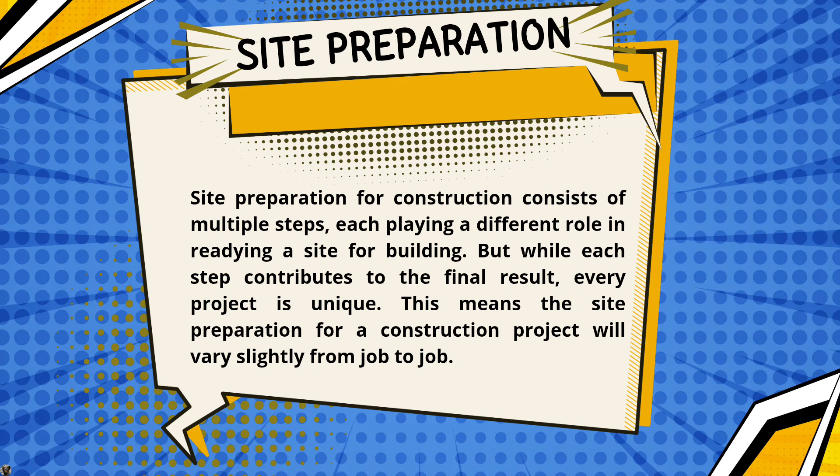Okay, firstly, we have site preparation and setting out. Okay, so what is site preparation? Site preparation for construction consists of multiple steps, each playing a different role in readying a site for building. But while each step contributes to the final result, every project is unique. This means the site preparation for a construction project will vary slightly from job to job.

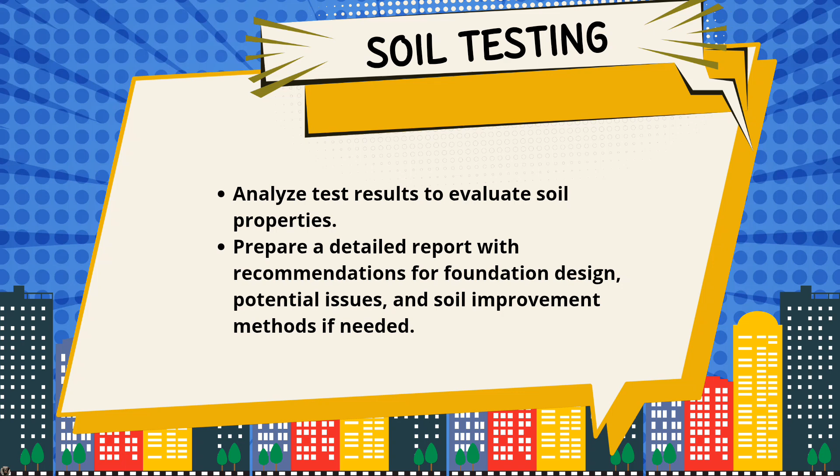Okay, so this is the step of site preparation. First, we have soil testing. Soil testing can analyze test results to evaluate soil properties, so we can prepare a detailed report with recommendations for foundation design, potential issues, and soil improvement methods if needed.

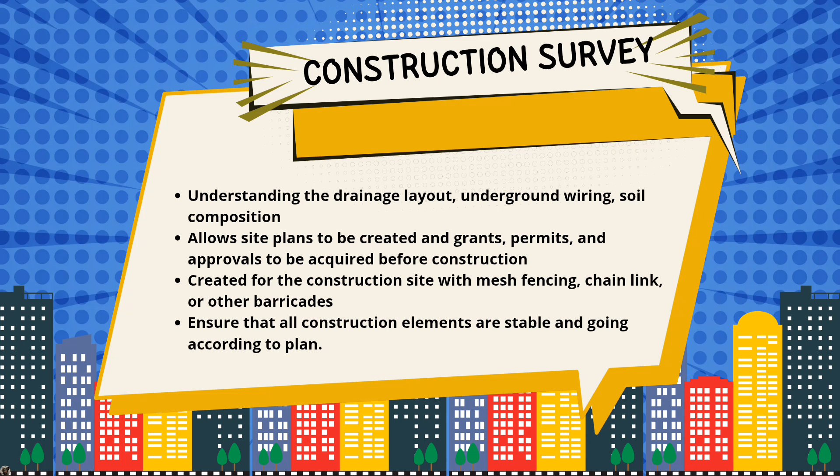For construction survey, this means understanding the drainage layout, underground wiring, and soil composition to allow site plans to be created and grants, permits, and approval to be acquired before construction. Construction survey also can secure the construction site with mesh fencing, chain link, or other barricades to ensure that all construction elements are stable and going according to plan.

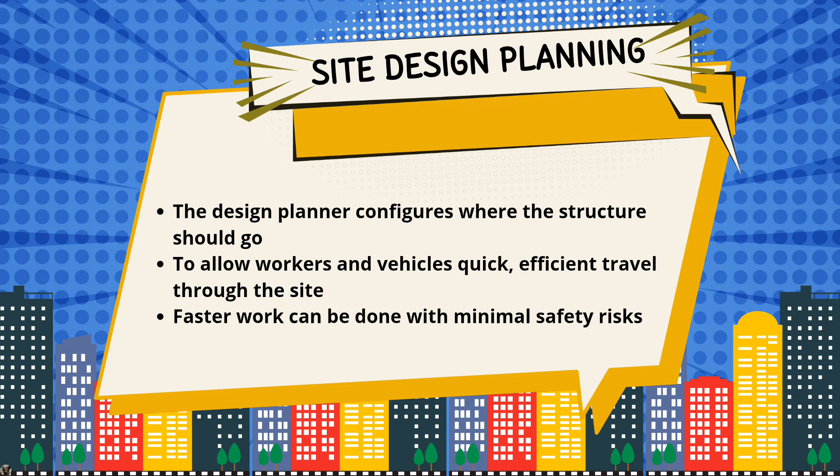After the site has been appropriately evaluated, a design plan can be created. The design planner configures where the structure should go, along with the septic and drainage system. Access points are also implemented to allow workers and vehicles quick access. The better mapped a construction site is, the faster work can be done with minimal safety risk.

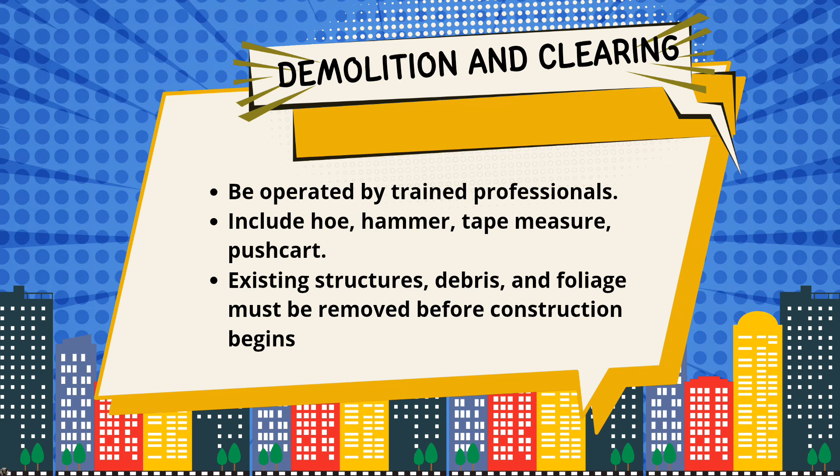For demolition and clearing, this will require heavy equipment that can only be operated by trained professionals. Equipment might include hoe, hammer, tape measure, and push cart. Existing structures, debris, and foliage must be removed before construction begins. This might include large rocks, tree stumps, old structures, or other obstacles.

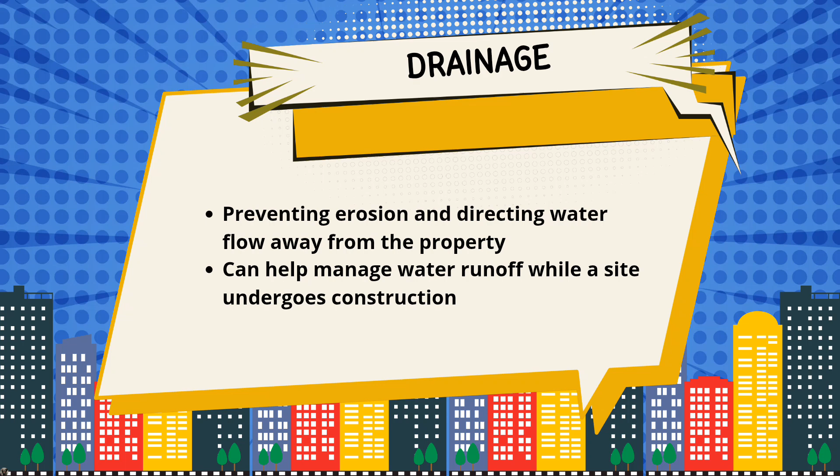So, it's time to install the drainage system. Proper drainage is crucial for preventing erosion and directing water flow away from the property. Systems like silt fences and retention ponds can help manage water runoff while a site undergoes construction.

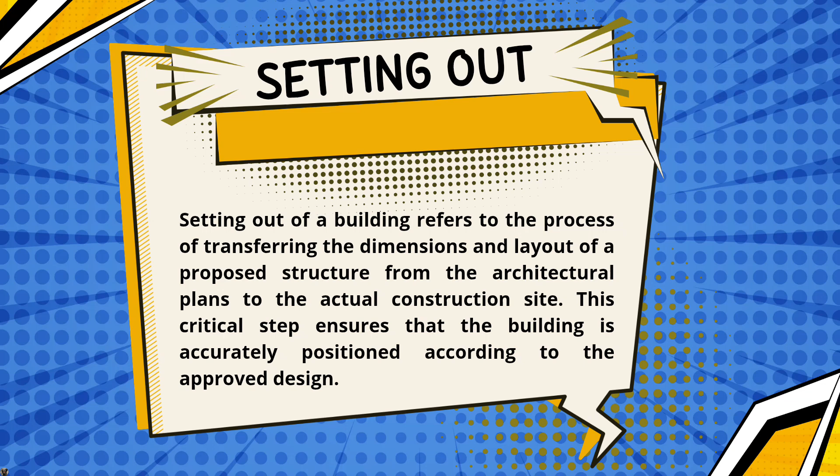Okay, so we move to setting out. What is setting out? Setting out of a building refers to the process of transferring the dimensions and layout of the proposed structure from the architectural plans to the actual construction site. This critical step ensures that the building is accurately positioned according to the approved design.

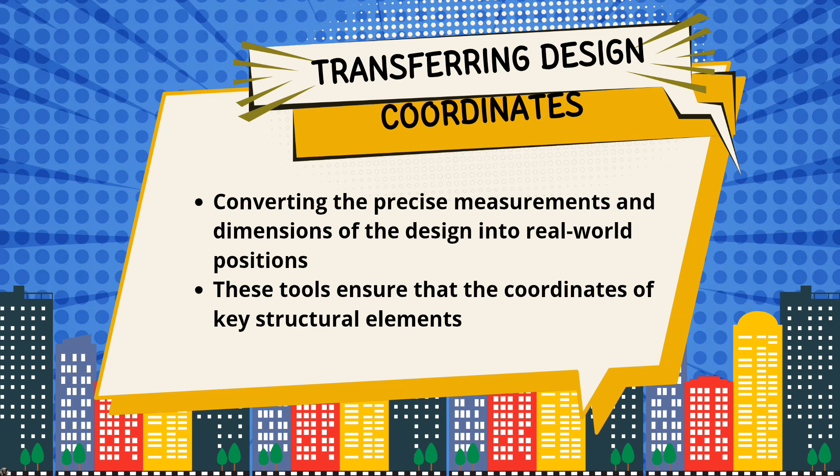So this is the step of setting out. Transferring design coordinates means converting the measurements and dimensions of the design into real-world positions. These tools ensure the coordinates of key structural elements. For establishing control points and markers, users can set up additional control points and markers that will guide the construction process. Stakes, nails, bolts, or paint are placed at critical locations around the site to indicate the edge of the foundation, the centre of load-bearing walls, or the position of columns and beams.

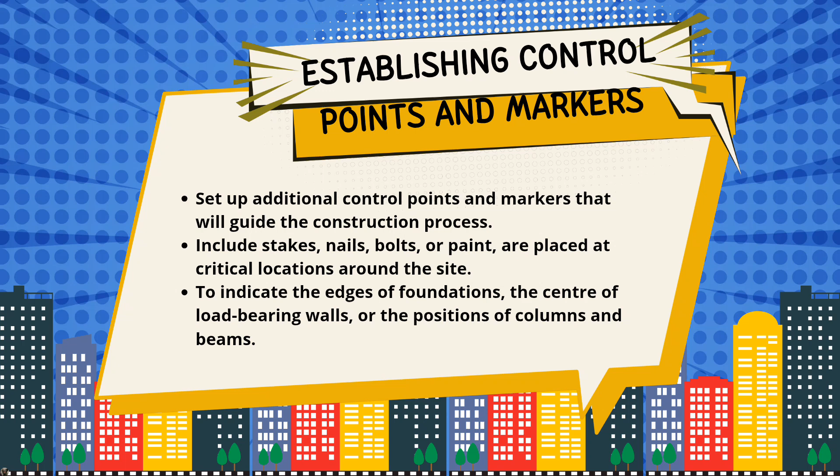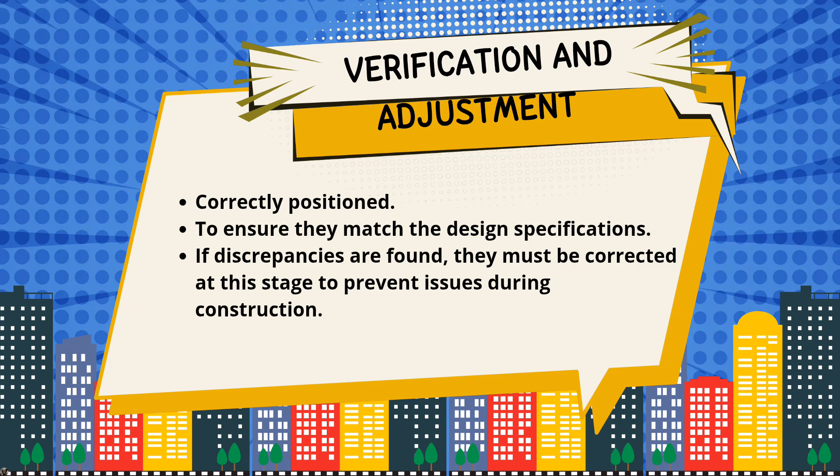And the last is verification and adjustment. Verification and adjustment check the positions to ensure they match the design specification. If discrepancies are found, they must be corrected at this stage to prevent issues during construction.

Good morning everyone. Today I will share about the woodwork and steelwork process, which involves three main steps: cutting, assembling, and finishing. First step is cutting. For concrete work, we use board and plywood to create the formwork. For safety, tools like bolt cutters and gloves are used to cut the steel mesh to match the size of the concrete slab. For cutting wood, tools such as a saw or wood machine are utilized.

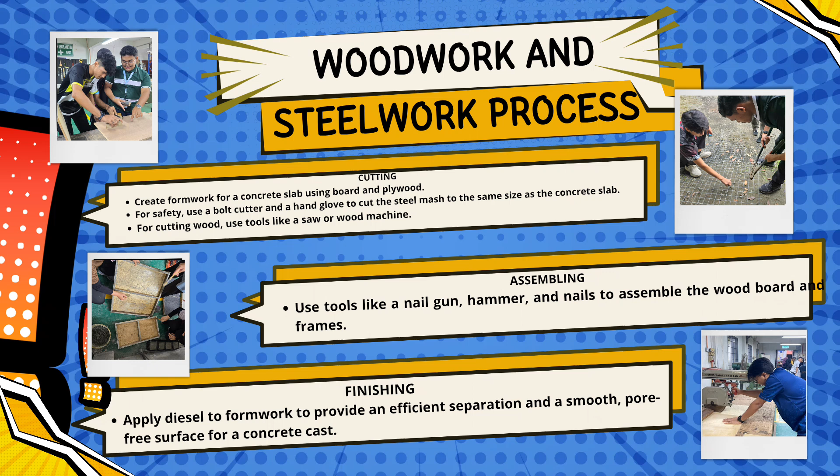The next step is assembling. In this step, we use tools like nail gun, hammer, and nails to join the wood, board, and frame together. This ensures that the wood formwork is steady and ready to use. The final step is finishing. This step is applied to the formwork to allow efficient separation and provide a smooth, pore-free surface for the concrete cast. This step is essential to ensure high-quality concrete results.

Concrete work process. First, I will start with concrete preparation. Okay. To put it simply, it's how to make concrete. To make concrete, we need the fundamental ingredients with which the mixture is made: water, sand, cement, and also aggregate. All these ingredients adhere to each other until forming a concrete mixture.

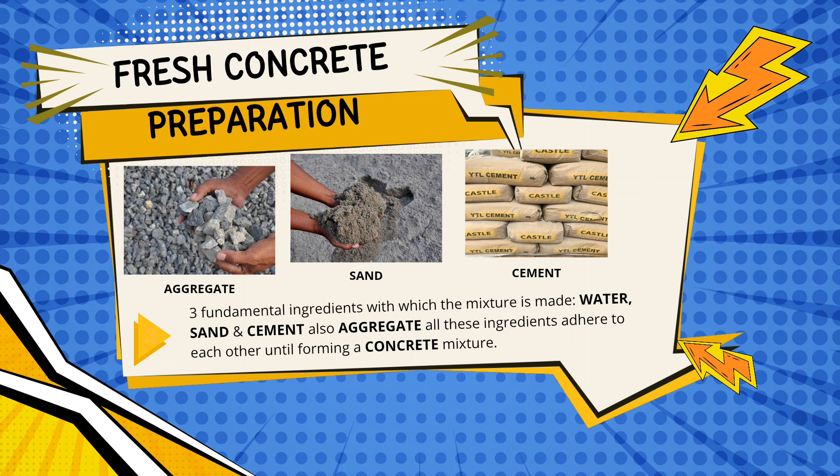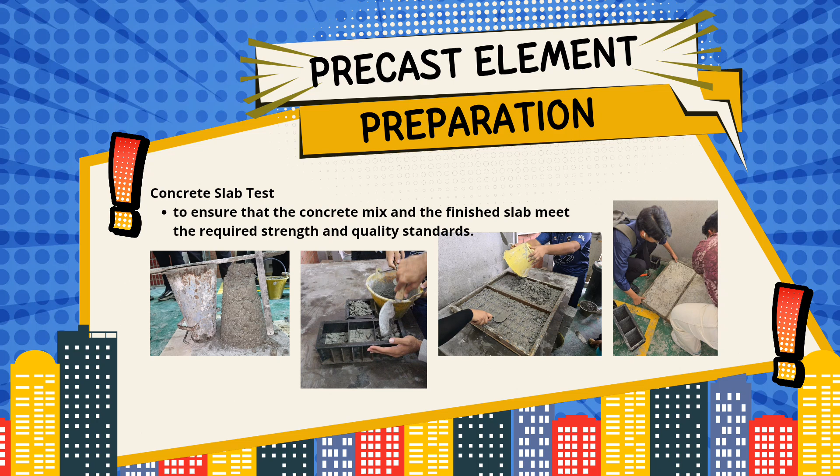The second process is precast element preparation. In this process, we do a concrete slab test. It is to ensure that the concrete mix and the finished slab meet the required strength and quality standards. The concrete work process. First one is in-situ concrete. The in-situ concrete process refers to the method of casting concrete directly on the construction site rather than using precast elements.

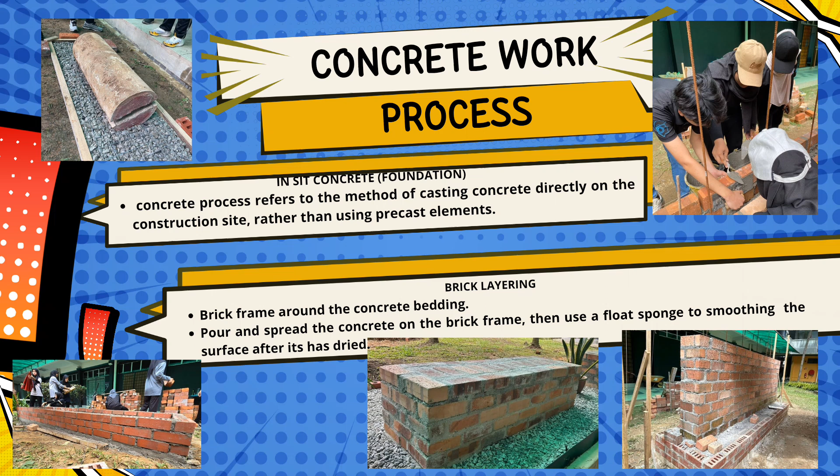And the second step is brick layering. Brick frame around the concrete bedding, and pour and spread the concrete on the brick frame. Then use a float sponge to smooth the surface after it has dried. Because we are not going to plaster it, it just looks like brick style.

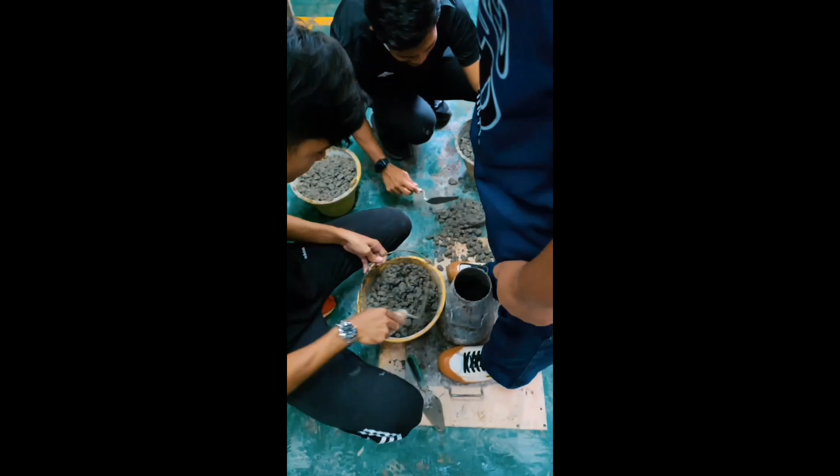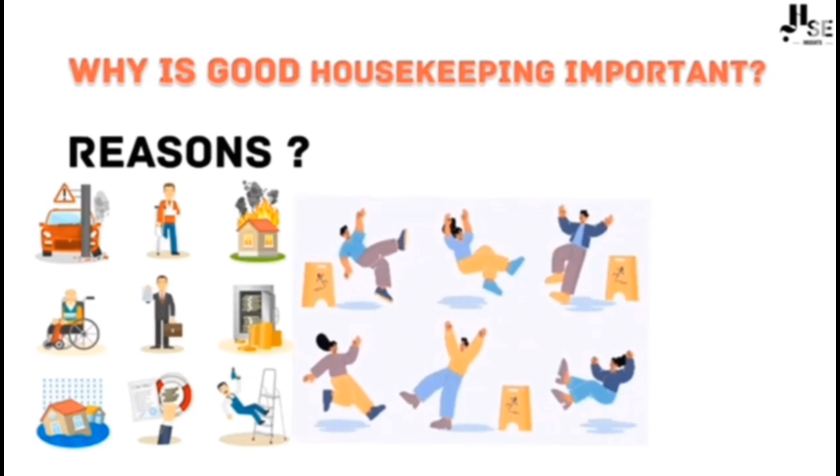What is housekeeping? Housekeeping refers to keeping a workplace clean, orderly, and free of hazards. This includes things like keeping floors clear of clutter, sweeping up spills, and disposing of waste properly. Why is good housekeeping important? Good housekeeping is important for a number of reasons. First, it can help to prevent accidents and injuries. A cluttered or dirty workplace can create tripping hazards, slips, and falls. It can also make it difficult to see hazards, such as exposed wires or sharp objects.